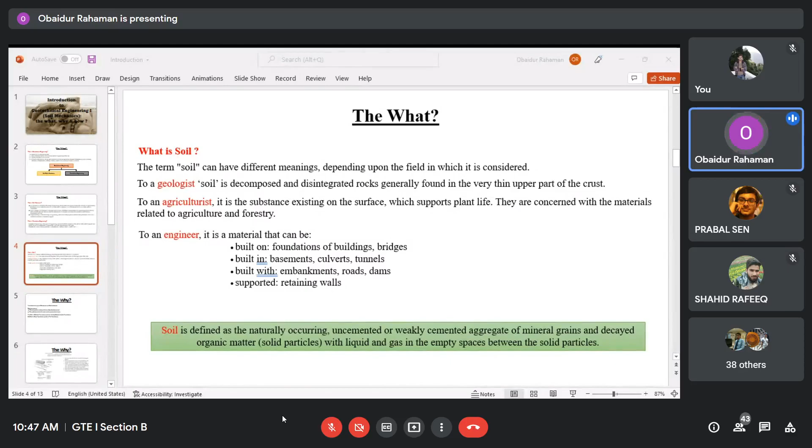They don't deal with the structure, the foundations, and all these things I have discussed here. They do not deal with things like slopes, retaining walls, roadways, embankments, tunnels, landfills. They are not concerned with these things. They are mainly focused on the material.

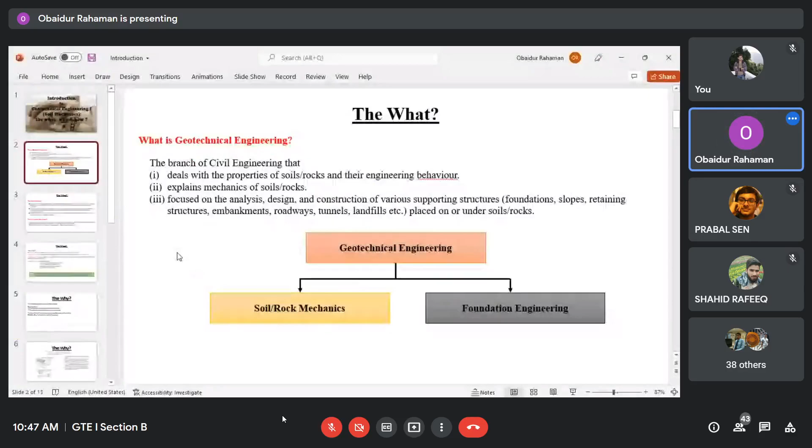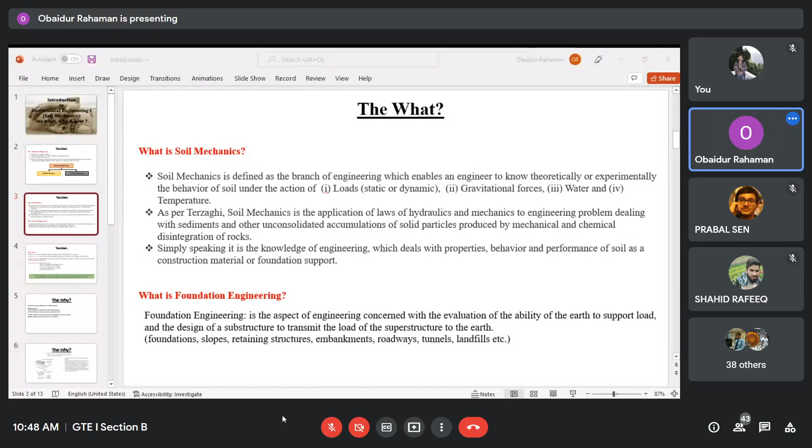Anything else? Okay, so if you don't have any more questions, I will proceed.

Now we'll come to the why. So I think in this portion, Prabal, you may get your answer more clearly, that why we should read geotechnical engineering. So suppose we want to build a structure, okay? So what will be the foundation? If you want to build the foundation, how will we build the foundation? We mainly design or build this foundation based on two criteria.

One is from the strength point of view, that there should not be any failure or any shear failure, because the material soil mainly fails in shear. That's why it is written shear failure. So there should not be any shear failure of the foundation soil. And the second aspect is the settlement: the settlement should remain within the permissible limits.

If there is a settlement which is greater than the permissible limit, then the structure, that is the superstructure, may collapse. That's why we need to be sure about these two different criteria. One criterion is from the strength point of view, and another is from the settlement point of view. So suppose we now want to build a foundation. What type of foundation will you provide? You will learn these things slowly. I am just giving you an overview of this.

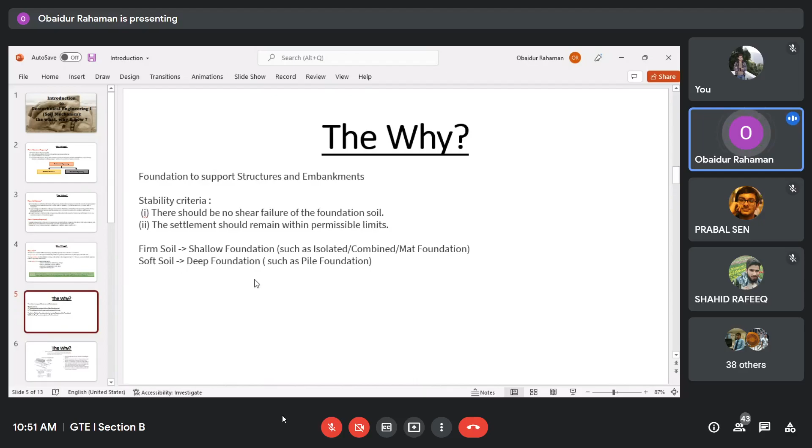Either it will be isolated or combined or mat or raft. And if the soil strata is soft and there is a hard strata after, suppose, 15 meters or 20 meters, then we can provide deep foundation, which will transfer the load from the superstructure through this deep foundation. Deep foundation means the depth of the foundation is more as compared to the shallow foundation. One example of deep foundation is your pile foundation.

Okay, so here is one case study, in the MIT Student Center. They were trying to build a school building, and below the building you can see in this picture that the first layer is soft soil, and then there is a layer of sand and gravel. Soft soil means the load bearing capacity is very less. Then sand and gravel, and there is another layer of soft soil, thicker than the earlier two strata, and below that soft soil there is a firm soil which may be rocky type.

So when they were designing the building and the foundation, deciding what type of foundation they would provide, they decided to provide a slab kind of thing, which is called mat or raft. But when they calculated the settlement, they saw that it was a huge settlement, more than the permissible limit. So how were they going to construct it? Obviously they could place a pile foundation, which is a deep foundation, but this is not that economical.

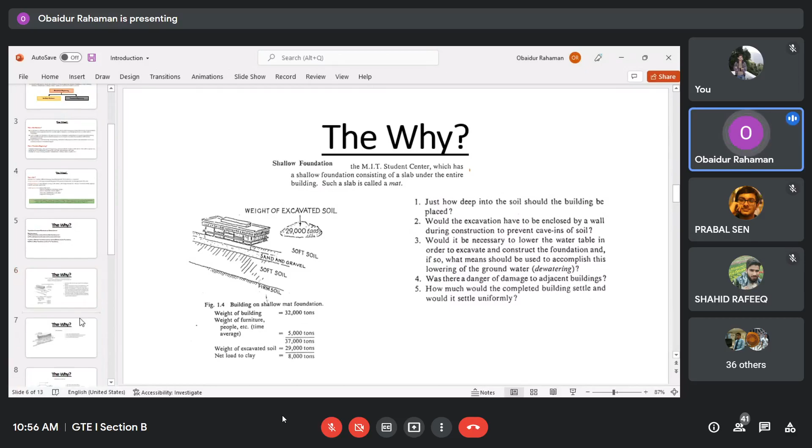Similarly, if you want to design a deep foundation, that is pile foundation, see here, these are called pile foundations. The top layer is soft soil, and there is a firm soil maybe 15 or 20 meters below the ground. So you want to directly transfer the load of the building to the firm soil. Then you need to place this deep foundation or pile foundation. So when you want to place a pile foundation, these questions may arise.

What type of pile should be used? There are different types of piles. There may be concrete pile, timber pile, driven pile, bored pile, cast in situ pile and also precast pile. So there are different types of piles which you will learn in your geotechnical engineering 3, I think. So what type of pile should you use?

How are you going to calculate the capacity of each pile? What is the maximum allowable load for a pile? That means if you put a pile, what will be the maximum load for that pile? And what will be the spacing if you need multiple piles? If you place multiple piles, what will be the spacing between these piles?

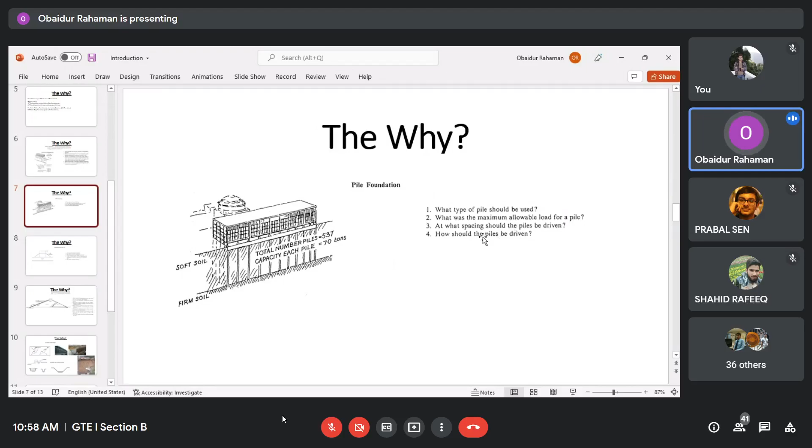Okay, how should the piles be driven? How are you going to place the piles into the soil? So these are various questions which will arise when you go to construct the pile foundation. So in order to know the answer, you need to learn your geotechnical engineering course.

Similarly, this is another case study. There is a layer of soft soil. Okay, now you want to place a tank on this soil, but when the settlement was calculated, it was found that the settlement was more than the permissible value.

So it is not possible to place the tank on the soft soil. So how are we going to construct this tank? One of the solutions is you place an earth embankment over here, an embankment which is filled with soil material, that is called an earth embankment, and you keep it for a time. Then there will be settlement of the subsoil, and when the soil has settled, you can remove this embankment and then place the tank.

So this was the idea, because if you place the tank directly, the soft soil will settle, and this settlement is more than the permissible value. So the idea is to settle the soil to its maximum value. That's why you place an earth embankment over this soil, then it will slowly settle, and when it has settled up to its maximum value, you remove this earth embankment and then you can construct your tank.

Sir, generally, what is an earth embankment made up of? Soil, this is a filling material. We are using the soil as a building material, as we said earlier. So for the construction of this earth embankment, we are placing the soil over this soft soil, right?

So while constructing this earth embankment, the questions that may arise are: how high a fill could be placed? That means what will be the height of this earth embankment? How fast could the fill be placed, what will be the rate of placing this earth? What were the maximum slopes for the fill, so that it does not collapse?

Could the fill be placed without employing special techniques to contain or drain the soft foundation soil? If we place the earth embankment over the soil and there is water in the soil, there will be drainage of water. So should we consider any special technique for the drainage of water? And how much would the fill settle when we construct this earth embankment? These are the questions that will arise, and you need to answer them.

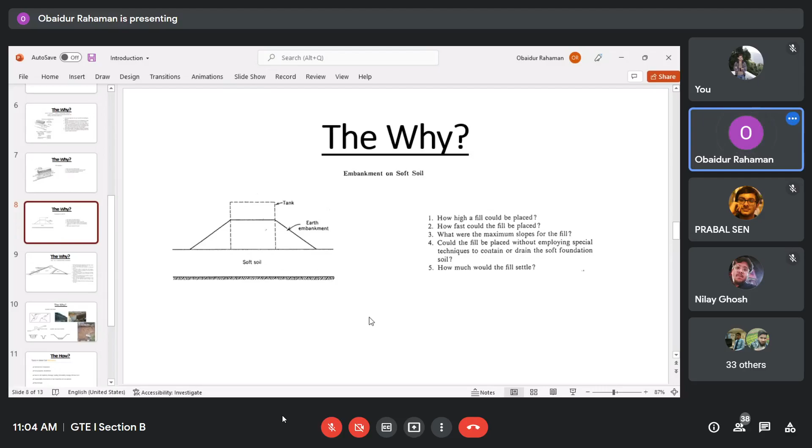These are the problems when we go to a site, try to construct a foundation, or try to use soil in different structures. We will face these questions and need to answer them, and make sure about the stability of the structure. So in order to answer these questions, you need to learn your soil mechanics or geotechnical engineering course.

So here is another example of soil as a construction material. This is an example of a dam. See, this dam mainly consists of two parts, that is the clay core and the rock toe.

Okay? And in between this clay core and rock toe, there is a gravel filter, and on the upstream side there is a rock facing and there is a gravel bed. So why have these materials been given? You can just think that there is a core of clay, and the permeability of this clay is very less.

So it is used to decrease the permeability. That means that the water should not leak through this dam. There should be very less leakage of this water through this dam. That's why this clay has been used in order to construct the core.

And here some water will obviously pass through this dam, and in order to provide this drainage facility, the rock toe has been provided here. Okay, and the clay should not flow through this rock toe. That's why a filter of gravel has been placed in between this clay and the rock.

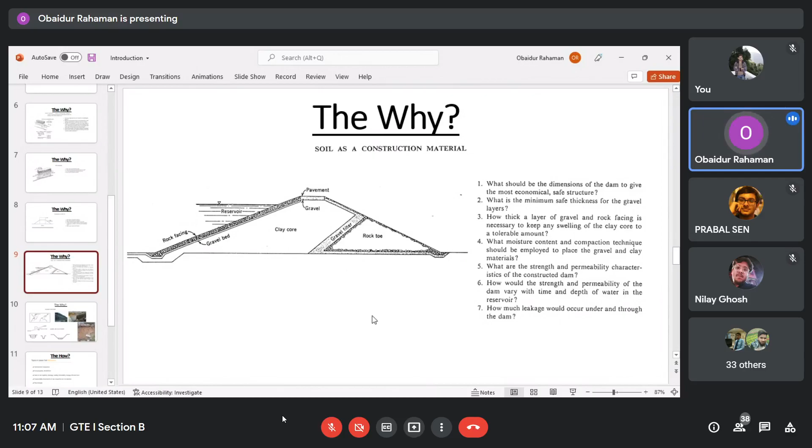So there are many other examples also, like retaining structures. You need to construct this retaining structure in such a way that it should not fail. Suppose there is a slope and you want to construct a foundation over the slope, so you need to calculate the stability of this slope. If I construct this structure, will this slope be stable? You need to calculate this.

If you want to excavate the soil, suppose excavation for a foundation, excavation in order to place a pipeline, or for a canal. So how should we excavate the soil? What will be the slope? Will there be a need of sheet wall or any lateral bracing? In order to answer these questions, you need to learn your soil mechanics.

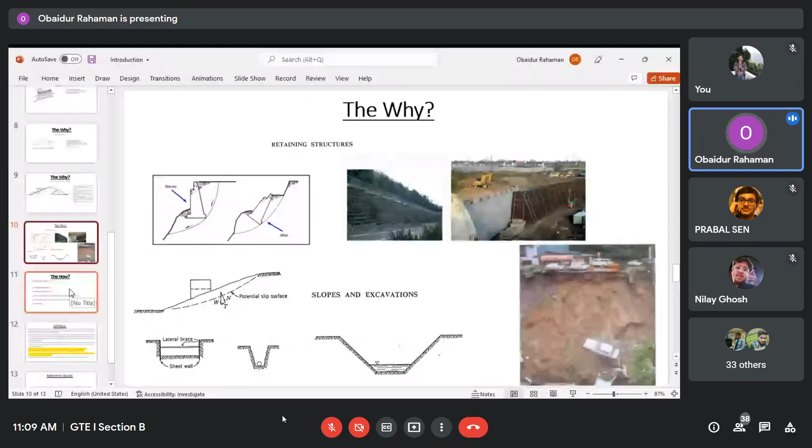Now the final question, how? So you need to cover all the topics included in your soil mechanics or geotechnical engineering 1 course. First we learn about the soil formation, the origin of your soil, and the composition of the soil. We learn about the different minerals present in the soil, then some properties called index properties of soil, and then how to classify the soil.

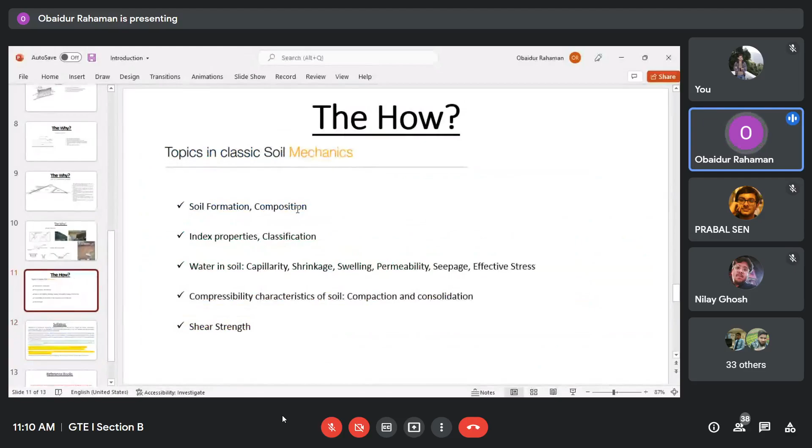Then we will learn some of the terms when water is present in the soil. Then capillarity, the shrinkage and swelling characteristics, the permeability of soil, the seepage through soil, and effective stress. Then the compressibility characteristics of soil, which is mainly compaction and consolidation. And then the shear strength characteristics of soil. So these are the key topics in your soil mechanics or geotechnical engineering 1 course. This is your syllabus, these are the main topics, and some details about them.

This has been colored in three different colors because this course will be covered by three different professors. Professor Narayan Roy will be taking the portion in green color, the blue color will be covered by Professor Arghoti Biswas, and this highlighted portion will be covered by me.

Okay, so there may be some problems with some technical terms. That's why first I will go through the topic of shear strength of soil. The topic of shear strength or shear stress you have already covered in your, I think, engineering mechanics or structural mechanics course. So I will start from this stress part, stress or shear stress or shear strength part.

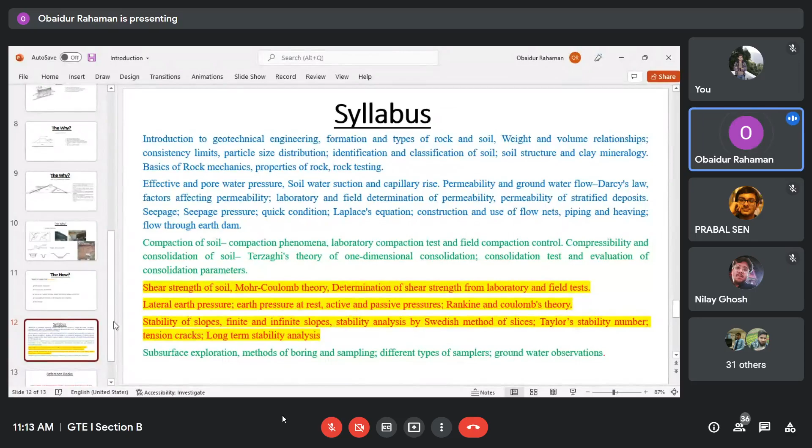If you want some reference, the main book which I will follow is Basic and Applied Soil Mechanics by Gopal Ranjan and A.S.R. Rao. And there are many textbooks. You can follow any textbook which you find more suitable. These are some of the references: Soil Mechanics and Foundation Engineering by Murthy, Principles of Foundation Engineering by B.M. Das, Soil Mechanics by B.C. Punmia, and Soil Mechanics by William Lambe and Whitman. So these are some reference books that will be followed for my portion.